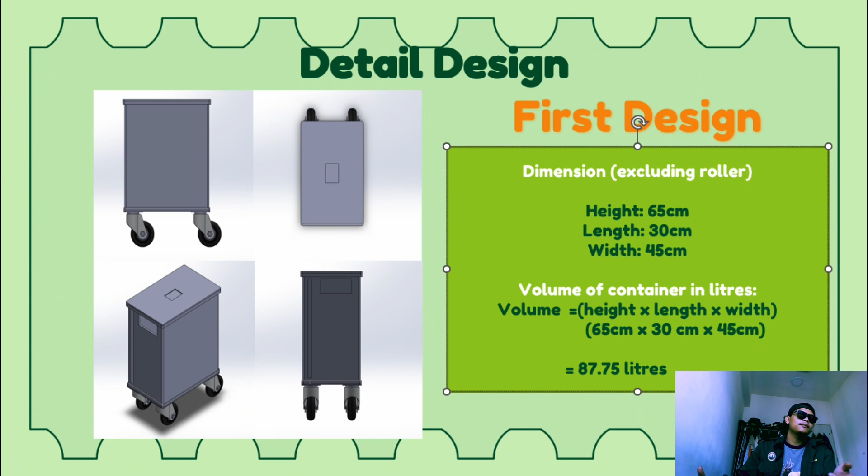Move on to our final design. For our final design, the dimension of the auto trash bin has been considered to ensure it occupies minimal space while still providing sufficient capacity for waste disposal, with a height of 67.5 cm, a length of 36.3 cm, and a width of 36.3 cm.

This trash bin can fit seamlessly into various environments, whether in households, offices, public areas, or even smaller spaces like bathrooms or kitchens.

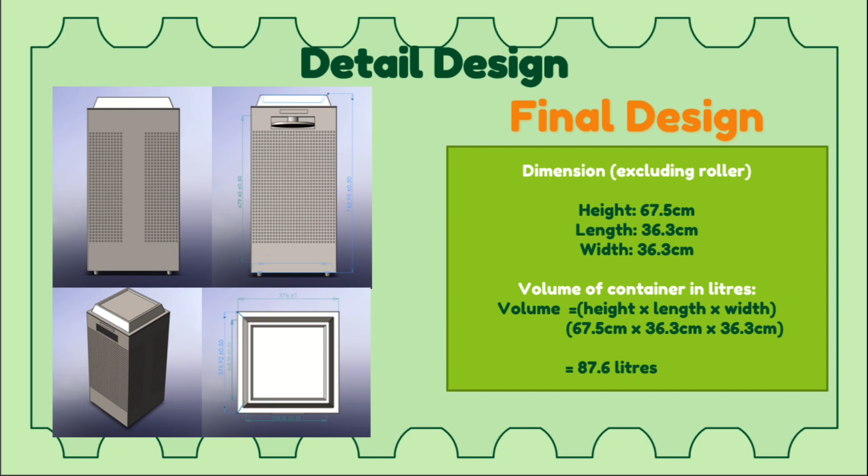With this kind of dimension, it will allow you to conveniently place it in areas with limited floor space or tight corners. Its compact design ensures that it doesn't obstruct pathways or take up excessive room, making it an ideal choice for optimizing space utilization without compromising on functionality.

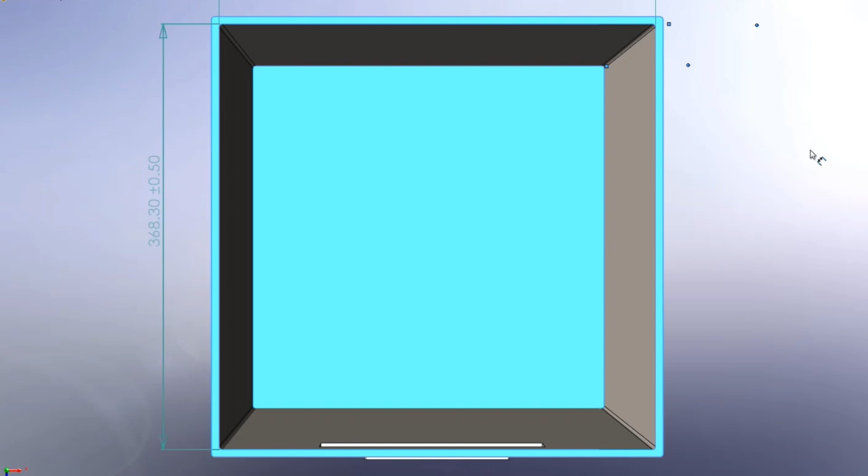The dimension of the auto trash bin struck a balance between providing sufficient capacity for waste disposal and being compact enough to fit in various spaces. This sizing ensures practical convenience and versatility in waste management scenarios.

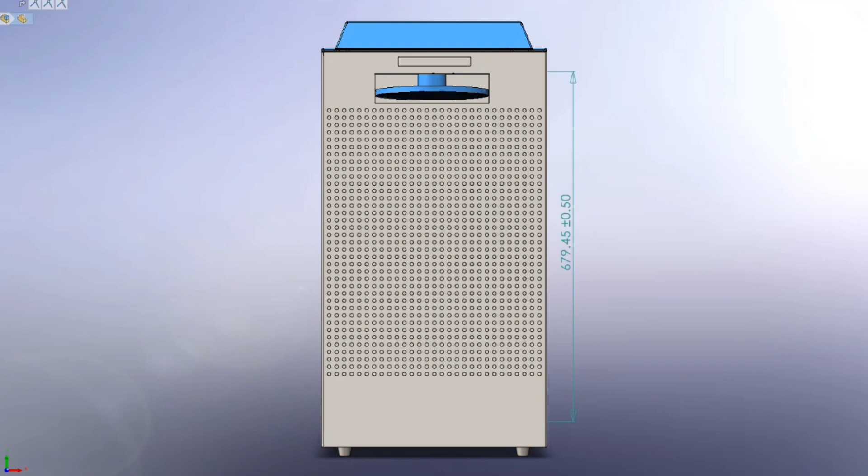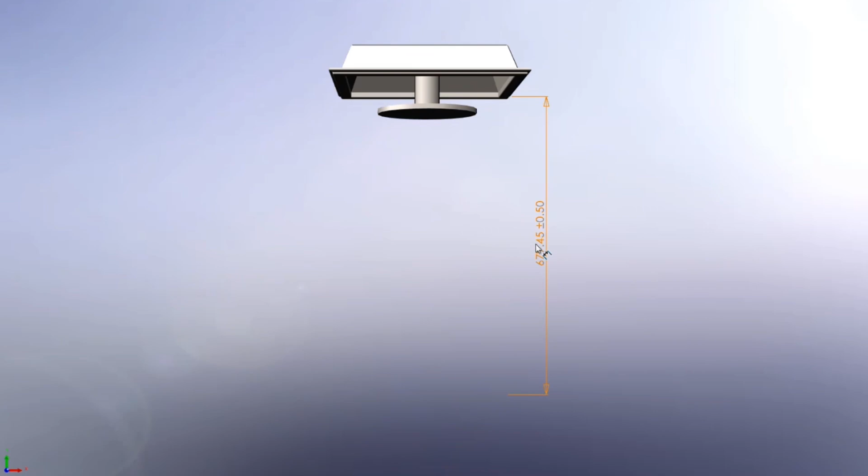Next, we move on to the lid part. We added a new feature called the compaction system. The compaction system is to achieve compression of the rubbish. The applied force from the compacting plate compacts the rubbish, reducing its volume by compressing it tightly. This compression action effectively increases the bin's capacity to accommodate more waste within a limited space.

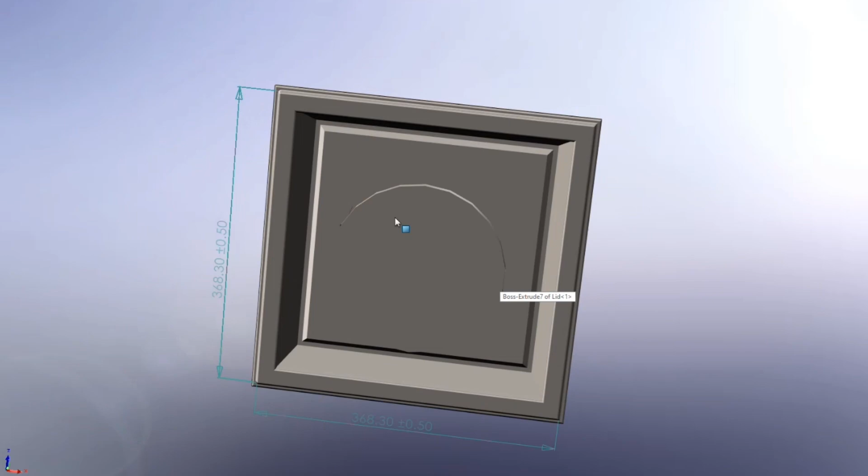The compaction system is usually equipped with sensors or switches. In our project, we added sensors to detect the fill level of the bin or monitor the position of the compacting plate. This ensures that the compaction process occurs only when necessary, preventing any potential issues or damage.

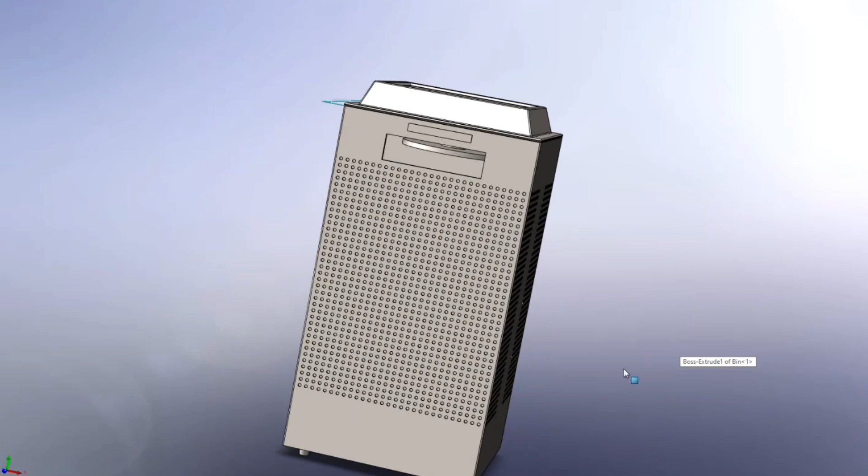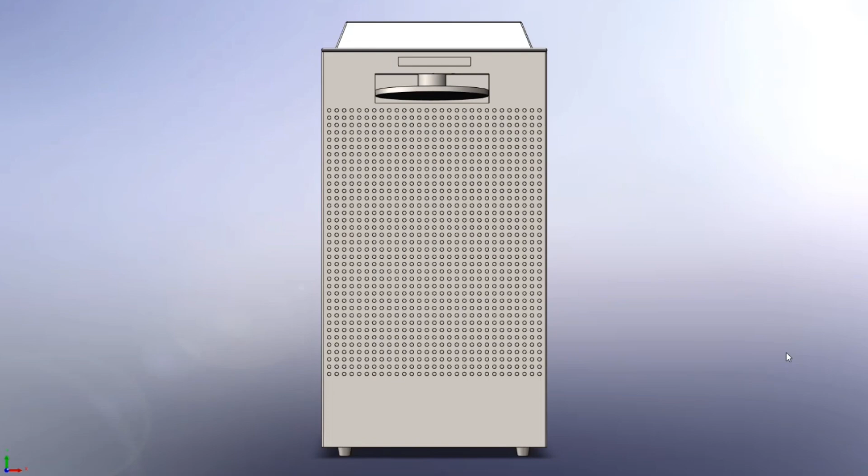We also added holes into our product for specific purposes. In outdoor environments, trash cans with holes are often used to allow rainwater to drain out. These holes prevent the accumulation of water inside the bins, which can lead to unpleasant odors or become a breeding ground for mosquitoes.

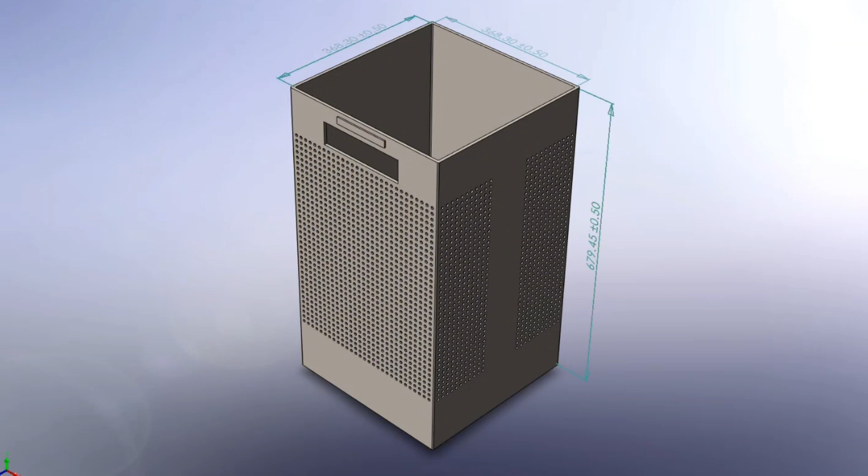Overall, the design of the auto trash bin represents a significant step forward in waste management technologies. It combines practicality, efficiency, and innovative features to provide an effective solution for waste containment. With its compact size, advanced compaction system, and user-friendly design, the auto trash bin offers convenience and effectiveness in managing and disposing of rubbish.

The automated trash bin can be particularly beneficial to seniors and individuals with mobility issues. Lastly, high-income households. Targeting households with high disposable income can be profitable as they are likely to invest in convenient and time-saving solutions.

Next, there are several benefits of the product. The first one is convenience - it eliminates the need for manually emptying the bin. Next, efficiency - it optimizes the waste collection and disposal process. Second, hygiene and odor control - it prevents foul odors and reduces the risk of attracting pests and insects.

Then, mobility and accessibility - the motorized bin makes the trash bin easy to move, especially for the elderly. Besides that, sustainability - it promotes sustainable waste management.